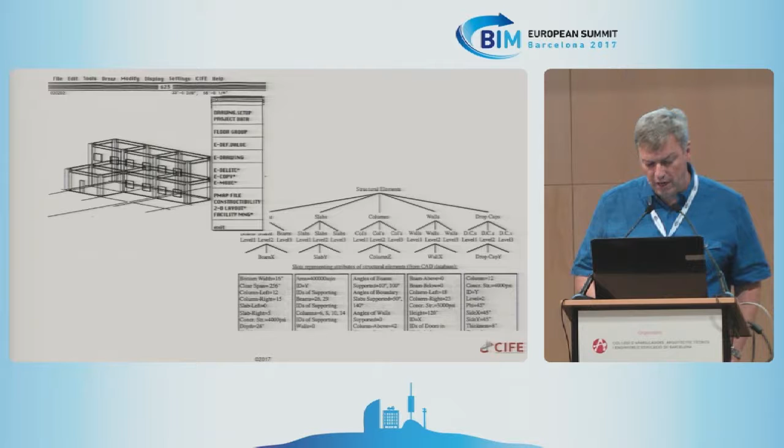In that way, BIM gives us the opportunity to combine general knowledge with project-specific information, which becomes incredibly powerful, and it's really fun for us as academics because it requires the formalization, as we call it, of new knowledge. So that was my real beginning with BIM, working together with Kenji Ito from Shimizu in Japan.

We got to work on a real project the first time in 1993, when we were asked to help that hospital project that was being renovated while it was fully occupied. We were able to use a 4D model. So for that we had to build a 3D model, of course. Even though the hardware, software was incredibly expensive, $50,000 in 1993 money.

Imagine if you extrapolate that and you go to your project director and say, I need this much money to just build some kind of model. People would laugh at you today. But that's what the project manager invested in it, and actually in the first sixth of the project, we paid the money back, just from the mistakes we found.

So we've realized the power of a model and the related visualization to inform a team very rapidly and allow the team to do a better job.

So a few years later, we had a benchmark project in our area. It was the first time in 2004 that a client, Sutter Health, a company that builds lots of hospitals, said if anybody bidding or anybody wanting to work on this project must work in 3D, share the 3D with all the other disciplines, and must use lean management methods.

Otherwise, do not apply. So that's where then the companies realized it was actually beneficial to have people working together instead of making a model like the mechanical guy, electrical, etc., making separate models, bringing them together once a week, finding lots of clashes, having to redo a lot of the work that you had done. Okay, it was better than the old way, but it was still a lot of waste.

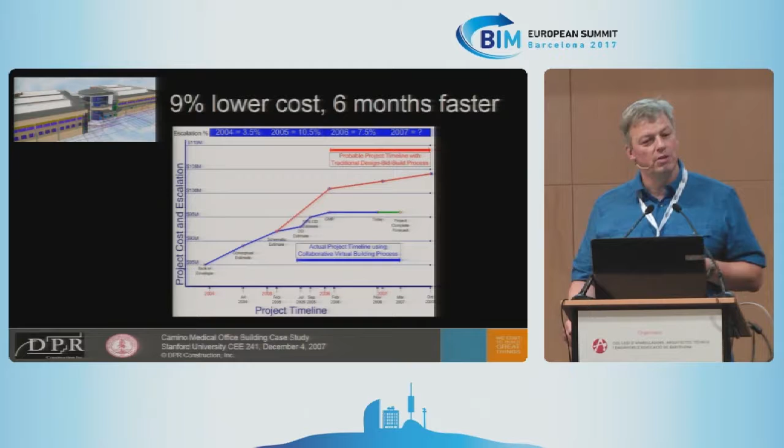This led then to the next project that was done between 2008 and 2012, a hospital. I think this turned into the first hospital in the United States where the client got the entire scope that he wanted, on budget, not for a penny more, and 30% faster than a comparable hospital.

And so this showed for us the power of what we call virtual design and construction, because we have the objectives, the targets that the project team needs to meet, from the client perspective, and then also from the project team's perspective. They had to make sure that the construction was highly reliable, but that's not just the contractor's problem, that's the whole design and construction team's problem.

If the designer doesn't create a good design, then you cannot have reliable construction. If the designer doesn't finish design during design, you cannot have reliable construction. And so often people tell me, well, Martin, this modeling, it's very nice, very good, but we're in a hurry. We have to start building, so we can't finish the design.

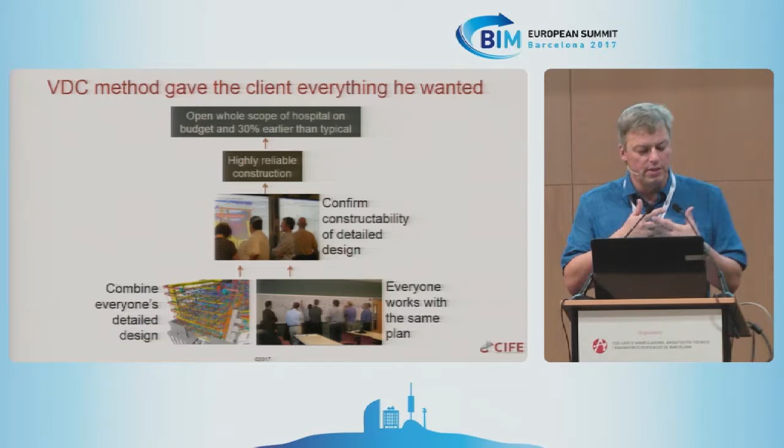Well, this project finished 30% faster than comparable, and they finished the design during design, so that there were basically no changes during construction. So it really required bringing the people together, or the disciplines, when it really mattered, to confirm the constructability of the design, and to adjust the process to take advantage of the ability of people to work together, make decisions, and supported by a very detailed BIM.

On this project for the $300 million hospital in 2008, they decided to model everything that was 1 centimeter or larger. Because when they started the project, all the parties looked at each other and they said, so where have we had problems in construction before? Well, the problems were always with the things that were not in the BIM.

The things that were in the BIM, we rarely have a problem in construction. So we would be silly not to put basically everything into the BIM. So that's what they did.

So this is sort of a very rapid journey that we were able to be part of together with industry. Otherwise, we couldn't make it happen. From over 15 or so years, to move from BIM as a technology to bring it together with the people and the process, and new targets, aggressive targets, which then creates what we call virtual design and construction.

So why, in my experience, is BIM so powerful? This is a case from a project in Germany, Neumarkt, by Max Bögl. It's a mixed-use building in the center of the town.

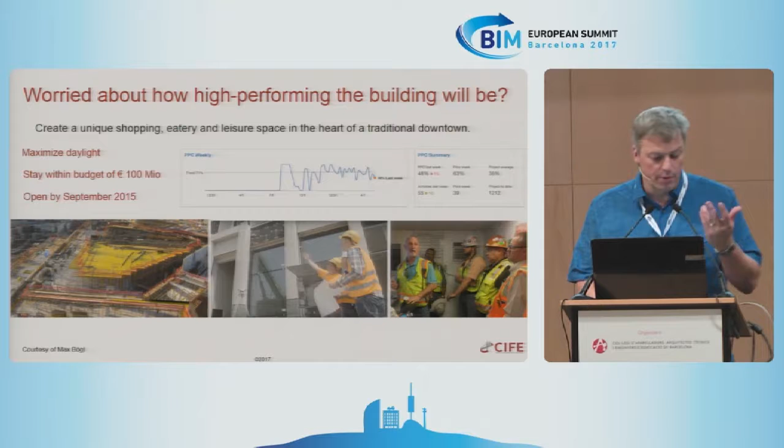And they were worried a bit about really being able to create a high-performing building. Are they going to reach all of the targets that they set themselves for this goal, for this project, which were pretty aggressive? So, they realized as they were looking at how the project was going that better collaboration could improve the project. That's true almost everywhere in the world I've had the pleasure to work.

And then when you look a little deeper, you realize that collaboration is, in part at least, not as good because the project information is a mess. We've talked about that before. Everybody has their own list, everybody's in a hurry, and then we spend time comparing lists and what have you.

And then you realize the project information is a mess because the processes, the workflows haven't really been defined well, or actually not as good as they should be. So then where should you start improving? You could say, well, start at the root cause, fix the processes. And in some cases that works well, but I found it's really difficult for the people to imagine new processes without having experienced something different. So you could start improving collaboration, because that's what you in the end want to improve.

That's also difficult to do, because why should people all of a sudden work together better, trust each other more? At least I haven't seen that happen. I cannot think of a cultural project where this was the case. So I have found that starting with information, starting with visualization is a great way of getting people to work together, start to trust each other, solve problems together instead of pointing fingers, and then eventually they realize they need to change the processes, but then they're able to do it.

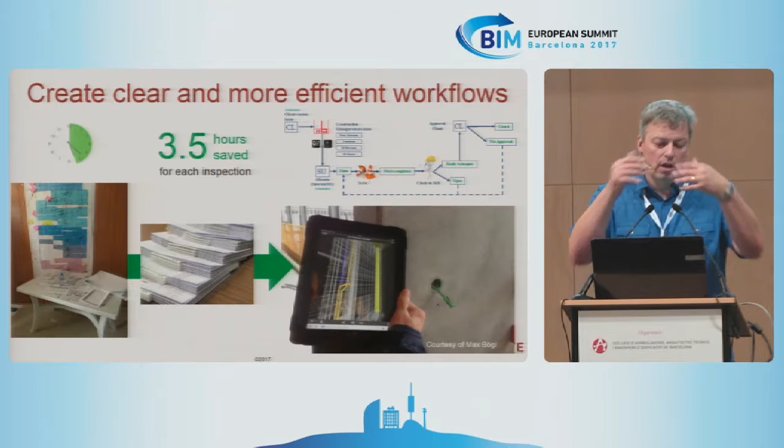In this project, they started to create shared visualizations to understand, for example, how different daylighting options affected the project and how they would fabricate it. Through that, they started to work together more, which allowed them to create new workflows and processes that leveraged these tools and started to measure. With that, they saw where they needed to improve, and in the end they were very proud of the high-performing building they delivered, a very high-performing shopping mixed-use project.

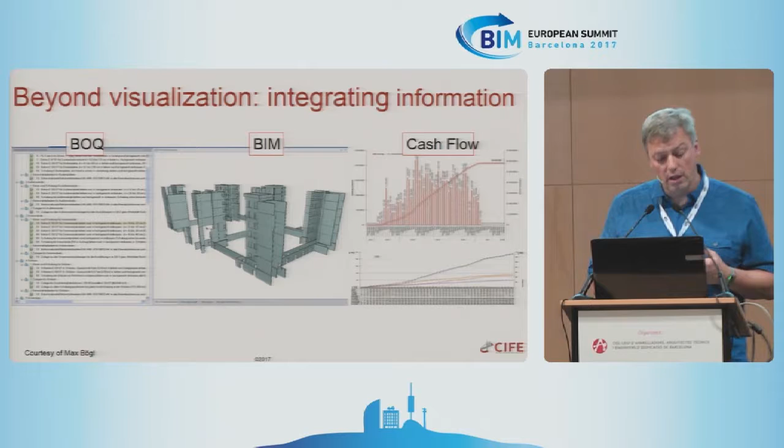So what you see here was mostly the power of visualization to bring the project team together. Of course, there's more to BIM. They also realized they could leverage the information in these models to, for example, connect with cash flow. And they had the idea that once you have a computer representation of your building, you can start to automate it. We saw some examples earlier already, so they created scripts to almost automatically create, for example, a parking garage.

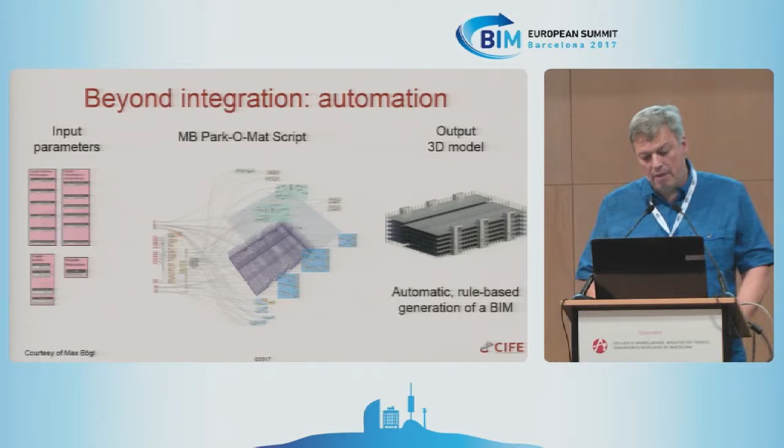So the first sort of BIM, bam, boom in terms of doing more with BIM is that we have these three types: the power of visualization, the power of information integration, and the power of automation. And I think on any project today, you should have a strategy for which decisions, which tasks you're going to support with a visual BIM, an information-connected BIM, or automation.

And so, as you saw, BIM is an essential part of virtual design and construction, together with adjusted processes, bringing the teams together. We call it integrated concurrent engineering in support of project and client objectives.

So we had lots of these anecdotes from projects, these examples, and we were asked by Wiley to write a book on initially integrated project delivery. We changed it to call it integrating project delivery, to highlight the need for everybody to work on integration, that it wasn't just a thing you could buy, you had to work on it. So we wanted to highlight the active part.

The book brings together many experiences from practitioners collected by the two authors who work at DPR, a leading construction company in our area, and Howard Ashcraft, one of the leading lawyers in relational contracts—not contracts that keep people apart, but contracts that bring people together—and then us at Stanford in terms of the research we've been able to do. We think this describes the book, how we think projects should be done.

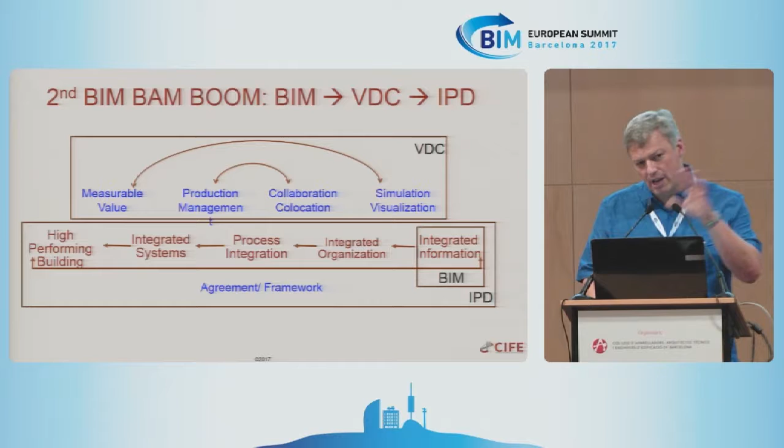So this is sort of the second BIM Bam Boom: from BIM to VDC to IPD. Because you have IPD represented here, and if you look carefully on top, the methods - they are all the methods in virtual design and construction: the definition of the objectives, the collaboration of the people, and then the revised, better managed processes, and the information on the basis, the simulation and visualization, on the basis of BIM. So hopefully this allows you to connect these acronyms a bit more.

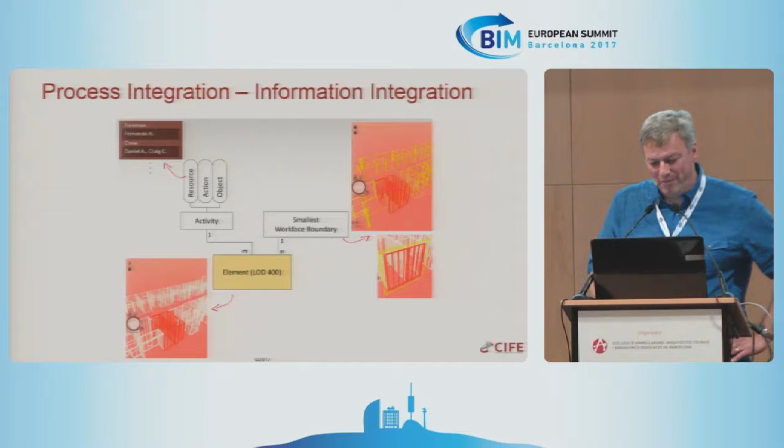I think I should just jump through this section fairly quickly. I was maybe a little aggressive in what I could cover here in a few minutes. I will just jump through this. Never mind. I'm happy to talk to you afterwards.

Stated by Donald Knuth, a Stanford computer scientist, in 1974: science is knowledge which we understand so well that we can teach it to a computer, and if we don't fully understand something, it is an art to deal with it. Since the notion of an algorithm or a computer program provides us with an extremely useful test for the depth of our knowledge about any given subject, the process of going from an art to a science means that we learn how to automate something.

This is what I have found so fascinating in the last 30 years working with companies, trying to automate things that so far have been an art. Trying to do that really establishes the boundary of knowledge that we have. There's still going to be, for many years, a lot of things that are an art in terms of engineering buildings. But many more things we can make more scientific, and then we can automate them, and apply them more widely, more consistently, and more rapidly.

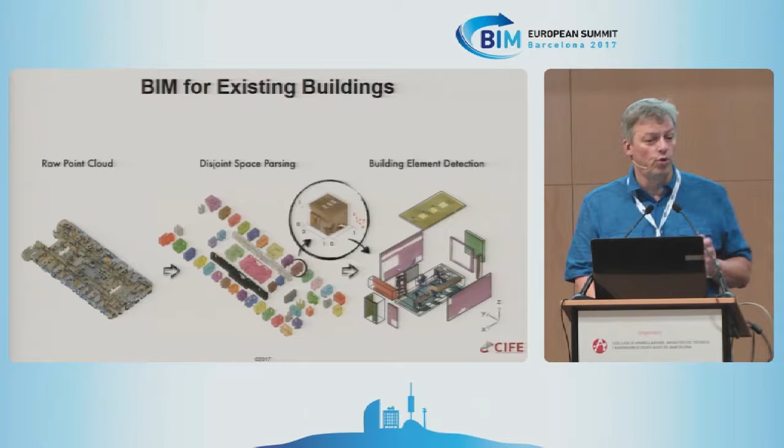So together with a computer vision professor, Silvio Savarese, we developed a method to go automatically from a laser scan to a set of rooms. The computer automatically recognizes these rooms and then automatically recognizes in each room what is there, so that you can go automatically from a laser scan to a simple BIM, where, for example, it will tell you how many chairs are on this floor, or other useful things like wall area, etc. All of this automatically from a laser scan using computer vision, pattern recognition, and machine learning methods.

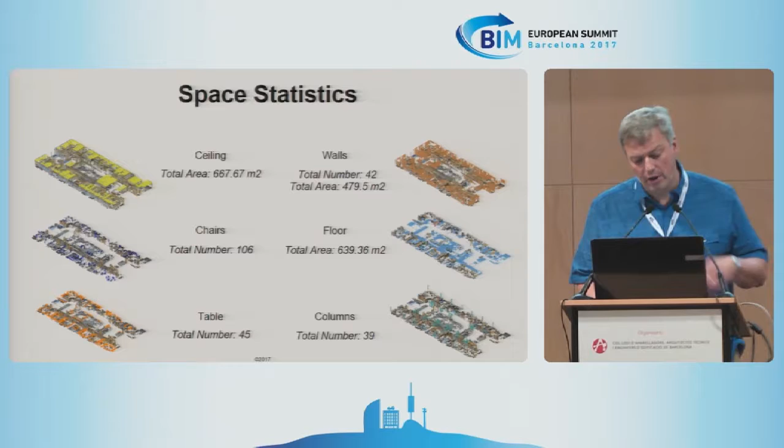So then you can quite quickly change an existing building, try out different things, for example, taking down a wall, which would normally be time consuming, but here it's just a click, and then you're done.

All of these methods, I think, are really critical for us to employ very soon, because, as I already said at the beginning, this is really just the beginning of more and more technologies and opportunities. You all hear every day about opportunities from mobile, cloud-based computing, parallelizing processes, location measurement methods, machine learning, robotics, additive manufacturing, Internet of Things, virtual environments, collaboration, lean management.

And if you think about it, these are all in the newspaper every week, every day sometimes, and it's the combination. Any one of those will have a big impact, but it's really the combination of these developments that creates huge opportunities. But we cannot harness them if we don't have a formal representation of a building, like a BIM.

So my vision for the future of the industry is that every work hour builds the right product safely and productively. This is pretty challenging, but we have BIM to represent the product, we have BAM to represent the building assembly, and then we have BOOM in terms of the operation, to have the right building, right for the user, right for the environment, etc.